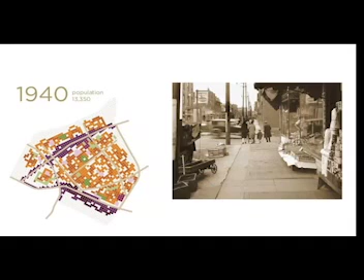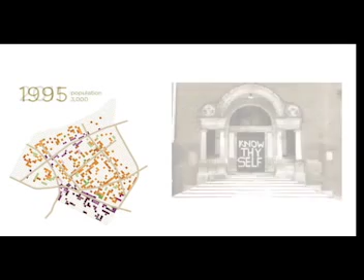In 1940, things were booming, but by 1975, the population had dwindled by half. By 1995, again the population was cut by half, down to 3,000. And in 2011, when we worked with them, the official number was 2,000, but there was probably about 1,100 or 1,200 people in the community.

This is pretty difficult for folks to go through, and there's a lot of social trauma that comes with this kind of devolution of city systems. I want to point out that this school you see in this image will play a part of the story later.

We worked with the community, the Larimer Consensus Group and the Kingsley Association, to think about what their future could be, and talked about things like stabilizing, consolidating resources—whether that be vacant lots or human resources—growing, and how one can create economic security, and diversifying to increase resiliency.

And then finally, when you get to a condition of stability, how do you sustain that stability? How do you maintain vibrancy in these communities? So if I put these two diagrams side by side,

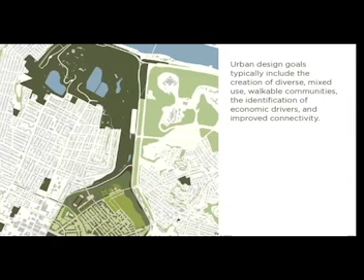We often talk about urban design or the creation in neighborhoods and cities with land use, and we might talk about open space or mixed use, and we'll talk about connectivity. Those are all really important things that will continue to play a role.

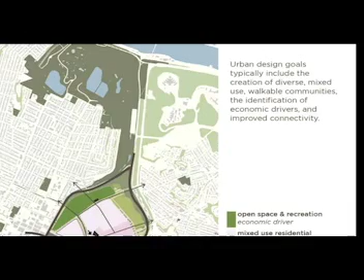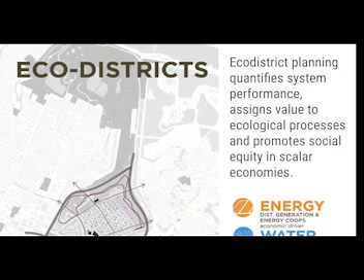But in order to transition to thinking about eco-districts, we need to talk about the resources and flows that move through a site. So what is the performance of that system? How do we assign value to ecological processes? And how do we take into account social equity at all these different scales that we might be discussing?

So environmental systems depend on physical infrastructure, but they also depend on social infrastructure. And eco-districts allow us to have that conversation. They're holistic models of sustainability planning. And really, it empowers people to take ownership over their individual and collective futures. So it's very concerned with how a community sees itself, how it functions together, and how it relates to its infrastructure. So we talk about eco-districts as focusing both on the hardware, or physical systems of a place, as well as the software, which sounds remarkably like how that report defined resiliency.

So we did a little thought experiment, looked at all the past plans that had been thought about for this community, and kind of put all the strategies out there and said, how do you begin to understand all these things that you do in a community? They're all great, all these kind of sustainability strategies. And we said that for each of these systems, though, there's a kind of optimal scale or scales for that system to function effectively.

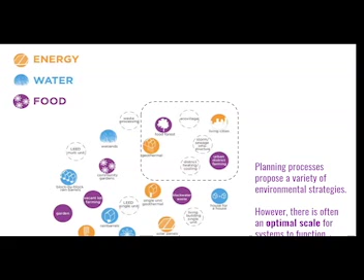For instance, anybody can change a light bulb or plant a garden, and they should. But in order to work as a city or a community, it needs to be aggregated to get to a larger scale, but perhaps not as large as the scale that it had been functioning before. Decentralization is now more possible, and in many cases more resilient than some of the larger systems.

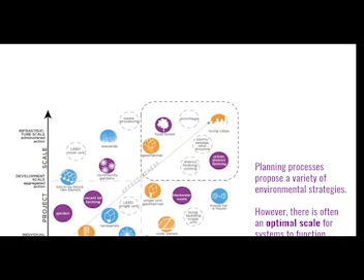So when you look at some of these things, they take more time and they are larger scale, they take more capacity. And so we look at what the community capacity is to relate to these systems. So how does a community make decisions? How do they transfer knowledge or learn together? Do they have legal structure to act, and do they get financial resources? Most communities start with financial resources. If we only had money, that'd be great. However, in order to get that, you have to have these other three things in place to function effectively.

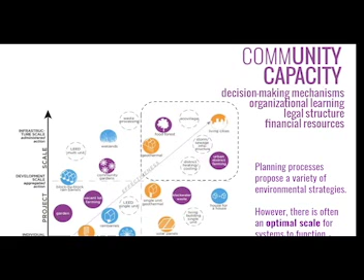So in thinking through how this works, we begin with questions, and they have to be big questions. How can energy independence make a community more resilient? Place is really important, and how we might design things to embrace these systems and to demonstrate these systems and to function in these systems.

But so is performance. In this community, we asked, what would it take to make a net zero community? It would take actually 40 acres of photovoltaics and 63 acres of commercial photovoltaics to deal with the residential and commercial loads. And when you look at the actual pattern of the community, those squares or those areas, there's actually not enough rooftops. You're really looking at a kind of utility scale to make that possible. So we're looking at interim opportunities for generation and interim technologies as we continue to look for opportunities to make net zero contributions.

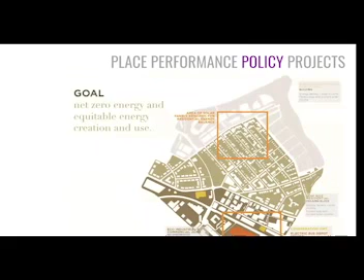You look at projects, and this is the part that people focus most often on, but it has to be paired with these other big picture ideas. You look for opportunities when a school comes up for renovation where you can do things like geothermal or solar, leveraging public infrastructure. Look for where new things are being built and amplify the standards, incentivizing above and beyond performance. And you have to look at the existing fabric to understand where certain technologies can benefit the systems and the people already in place, knitting it back into the community fabric.

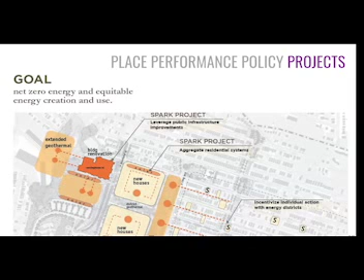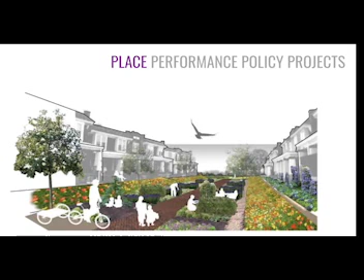Likewise, we looked at food systems. What is the character of place, and how does it not just represent a beautiful area or spatial typology, but how does it represent different ways of working together? What is the performance that should be targeted for this? In this case, taking the Living Building Challenge and looking at how we might meet some of those requirements for on-site food production at the scale of a neighborhood. And then really importantly, how does it play out with the patterns of the site, where do you have opportunities to connect the dots and make sure those resources and flows work together?

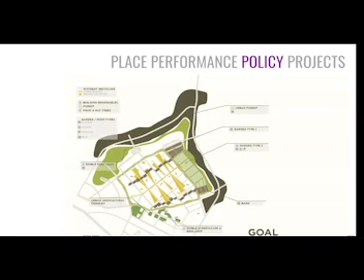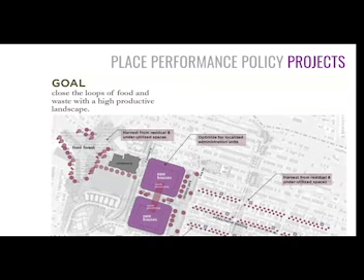And then taking it back down to the project. Things get done by project scale, so you have to bring it back down to a project scale setting. So the last one that I'll share with you is water, and how does water become an asset, not a liability, was an abstract but important question for this community when we started.

We looked at place and what the opportunities were to make interesting places relative to water, and what performance we needed to get to a net zero aspect for every community member there today and every community member in the future. We looked at what opportunities there were because we knew we had things like stormwater overflow problems to solve and upcoming infrastructure investments, something that most cities are dealing with.

We looked at policy scale of how different things get enacted in different places, how a residential area might benefit from certain policies and incentivize water streets or public realm improvement, while say the larger scale developments or even light industrial might be more site-based or development-based infrastructure.

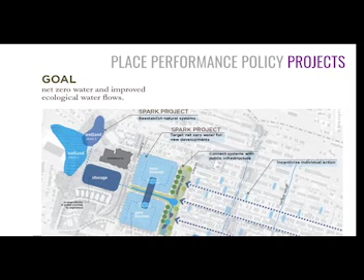And lastly, we looked at different projects, again looking at this area to say, where is there large-scale infrastructure improvements planned, or building projects planned, and how do we take a part of that performance and apply it to that site, and weave it back into the systems of the community.

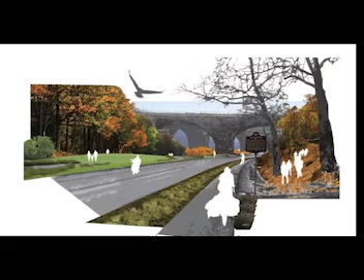While doing this, tragically, just downstream, we had a disaster that was very powerful to us and the team to understand the importance of our work. This site that we had kind of imagined as part of that process now has storage warehouses because it's not a great site, and it's less than perfect for occupancy. But really, when you look at the ecological pattern, it wants to be a water storage place. It wants to be a wetlands and had indeed been a wetlands before. So as we begin to integrate the right solutions in the right places, integrate ecological systems, we have the ability to make change if we can get there fast enough.

And that takes us to the point of, how do we get this to scale? Can design really change a system or systems? We have physical scales, time scales, scales of influence, as Marc said. Let's talk about these to say, how does a community leverage so much more?

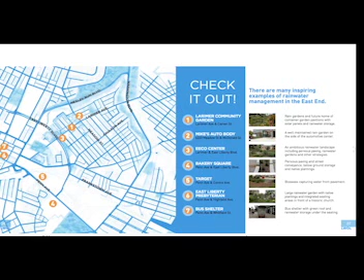Well, in Larimer, they were able to get a number of different infrastructure built, anything from top of the line green infrastructure at Google's headquarters to a water utility park for the community. They were able to leverage larger grants like the Army Corps of Engineers to look at centralized systems, still decentralized from the larger regional system, but how to keep that water and those resources closer to the places that they originate, and how to weave development into that.

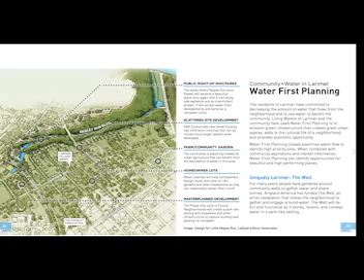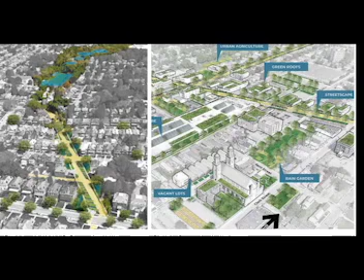This idea influenced things way beyond the community, including getting those principles included in Pittsburgh's Water and Sewer Authority's EPA-compliant Green First plan for green infrastructure, which then Buffalo Sewer Authority wanted to emulate in their Rain Check 2.0 plan. And it didn't just influence upstream, it influenced on the ground.

The Kingsley Association, a good community partner, is invaluable, and leveraged over $3 million in volunteer hours, trained energy auditors, helped people understand how to start micro businesses around this, and has been able to carry forth this into the lives and living of folks on the ground.

One of the most concrete ways that they leveraged this was to inform their Choice Neighborhoods Initiative development, and to get that $30 million that then leveraged $401 million with various infrastructure, public and private investments. And so affordable housing remains on the site, even maybe more than it had been prior.

Eco-districts influenced across the city all levels of neighborhood planning, from large scale, what we call tabula rasa, new developments on brownfield sites, to weaving it into existing neighborhoods, what we call quilted districts in the uptown neighborhood, influenced through city code, zoning code, and codes applying to master plans.

So the last one I'll just say is kind of how the ideas catch fire and how it creates influence and learning networks much broader.

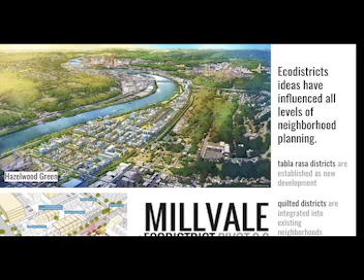A borough called Millvale was interested in this and took on, through two plans, a Pivot 1.0 plan and a Millvale Ecodistrict Pivot 2.0 plan, some great ideas appropriate to their community. That's a whole other presentation, but to say they caught on to things, started looking at air quality and food systems, and really began, through projects and these larger scales, to put these pieces of the system in place.

Their neighboring borough of Sharpsburg said, this is interesting, we have flooding problems, we have other issues, let's see how it applies to us. And lastly, their neighboring borough, Etna, said the same thing and took on a planning process that looked at how these things might apply to their municipality.

Together, these three municipalities formed the Tri-Borough Eco-District and influenced the formation of a citywide organization to help municipalities or neighborhoods talk about eco-districts, and that's called District PGH.

Working with the ecodistricts.org organization and the Ecodistricts protocol, they actually influenced what was included in the Ecodistricts protocol, and ultimately they became the first three certified ecodistricts in the world. That wasn't the point of what they were chasing, but the certification became a validation that what they were doing was recognized by others as being important and stringent, to be honest.

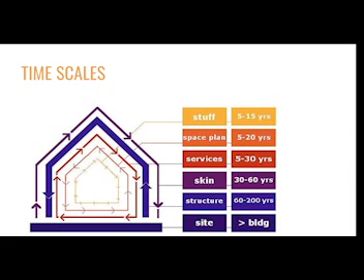There's a direct taxonomy of the things that are inside a building. If you look around yourselves right now, the furniture you're sitting around is going to ugly out way before it wears out. So a lot of things around you are going to change in 5-15 years, and that's expected. But if you look at the bigger things, working your way into the system, those are more durable. So we have to think in terms of that time scale when working with buildings.

The other aspect is the way buildings are delivered. You have the inception, then the design, then the construction, and there's many ways to deliver that. But once construction is done, there's this magical handoff to the owner, at which point the design and construction team is basically disincentivized from hanging around and learning more about the building. Meanwhile, the owner and the O&M team come in and start operating it.

So there are different frameworks we can apply to make better buildings. Living Building Challenge is an absolute type of system where we look at different imperatives. There's LEED, which is the gold standard as far as global green building rating systems go. I'm not saying it's the best, but it's the most prevalent across the world, used in 160 countries. Our firm has worked on hundreds of LEED certified projects, and it's a very good system because it allows you to plug in all the different strategies and goals you might want for a project, from design, construction, operations, and maintenance.

Passive House is emerging as a very key way to deliver buildings. Also simple goals, hard to achieve. But the idea is that if you make a very tight envelope, you can minimize your mechanical systems and make a better, more durable building.

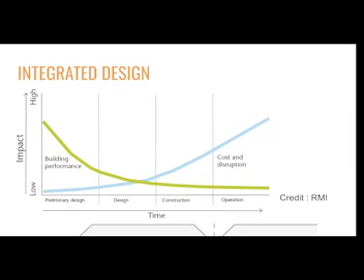The idea here is to make your meaningful decisions early, hence the goal-setting charrette and selecting a suitable framework. The way we approach that is by looking at the project goals, which we tie to the project or client vision and mission - whether it's a football team, a nonprofit, a healthcare system, a higher ed institution, or Mr. and Mrs. Jones wanting to do a renovation. You have these goals, and then you try to customize sustainability strategies to apply to that. So the idea is to start early.

Now we're here to talk about the Living Building Challenge, and we're up to LBC 4.0 now. I'm going to show you two projects - one was 1.0, the other was 2.0. But the beautiful thing about Living Building Challenge, without getting too much into the genesis of it, the idea was: okay, what's beyond LEED?

Back in 2006, a couple talented people, Bob Berkebile and Jason McLennan, took on the challenge to crystallize what makes a building achieve absolute sustainability goals with regards to water, energy, materials, beauty, and health and happiness.

The idea here is that you have these principles you work towards, and they're all prerequisites. Unlike LEED, which is a relative rating system where you get points if you do more, here there's really no room for error, which makes it more difficult to achieve.

The first project I want to talk about occurred in Pittsburgh. It's the Frick Environmental Center, part of the Pittsburgh Public Parks system, so it's free admittance if you ever get the chance to go. Here was the team, the architect Bohlin Cywinski Jackson, a notable national firm, as well as other talented folks.

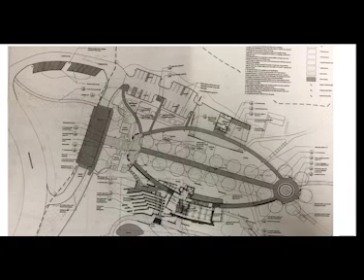There was an environmental center there back in the 1980s which unfortunately caught fire and burned down around the year 2000. So this building sat empty for about 10 years until the genesis to redo this came about 8 years ago. The idea is that it goes down that hillside across 3 levels with office space. Water, energy, and materials are going to be the 3 key aspects of a living building.

For water, you can see the rainwater catchment off to the upper left. Those photovoltaic panels actually double as water catchment panels, and you have site water as well with a cistern down below. Unlike other parts of the country, stormwater is a big issue in the Northeast. We love water and need it, but when we have too much of it too fast, it becomes a liability. The idea is we're able to store that water and use it.

It's not potable though. LBC allows you to draw that line where the law stands, and that's the case for us, so there's no question of drinking stormwater. Your results may vary, other places may be able to do that, but that's not the case for us.

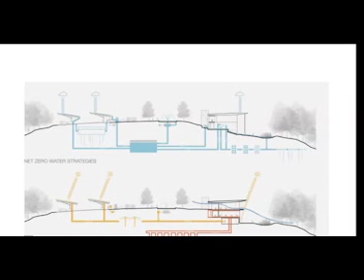Down below is the net energy zero diagram, and you can see a big photovoltaic array, I think it's 125 kW, and then geothermal heat wells down below. When you put all these things on the site, you've got the building on the bottom and the PV panels up on top, and they're there for a reason.

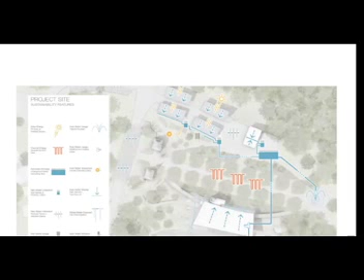That's a carport. So rather than typical terrible asphalt parking for your car, here you've got a very nice, comfortable place that's shaded by these photovoltaic panels.

The idea is that it's beautiful when it's not being used, or beautiful when there's a big storm and it becomes a rainwater garden that celebrates that. Since this is the Frick Environmental Center, it's meant as an education center too, so there are kids who come in and out all day getting classes and lessons on how natural cycles work.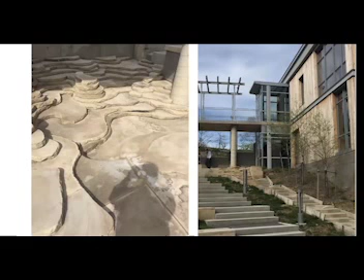Here's the rain garden to the left, shown in a dry condition, and you can see it in action on the right. And then tours, of course.

This is something we put together with the AIA 2030 series, so we had a number of people come through. I've taught classes at Chatham University, and this is one of our key places where we take people through.

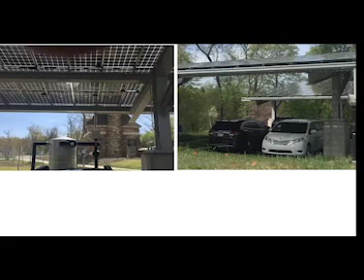There are the PV panels on the left and the cistern, and on the right you see cars parked under the PV panels. It's actually a very elegant way to do it.

The second case study we want to give you is the Phipps Conservatory Center for Sustainable Landscapes. This one was earlier, and it has had much more impact for a number of reasons. The Living Building Challenge came out in late 2006, announced at Greenbuild in November in Denver. In January 2007, Phipps's visionary leader, Richard Piacentini, decided he wanted to do a living building and approached us to help make this happen.

You can see the Design Alliance emerged as the architect, with CJL Engineering and Turner Construction. This was a process that ended up being successful, but for a time it was difficult to figure out, because we didn't know what a living building really was. It took a lot of meetings and thinking.

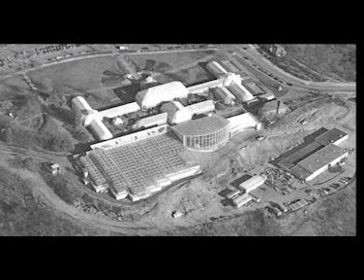The one with the black roof actually ended up being renovated subsequently as another living building. Stay tuned for that, because it's still in the performance period. We just helped it get a LEED Platinum certification, but the LBC is still in the performance period, because you have to show 12 months of actual net zero performance.

But it's the white buildings just to the left of that which ended up being demolished and created the site. This site was actually the spoils for city dumping—oil cans and things like that—so it wasn't a very clean site anyway, in spite of this beautiful southern exposure to one of the city's big parks. The first project I showed you was Frick Park.

This one is called Schenley Park. They're related topographically, but they're different areas of the city. Oops, sorry, I forgot about these things here—that's what have helped. Okay, project site. There you see where we are.

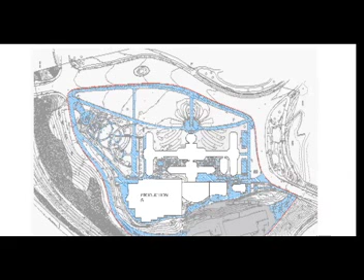Looking at it now from a straight north-south perspective, the area in gray at the bottom is the project site. The idea was to make a 24,000 square foot office building. Frick, by the way, was 17,000 square feet—I forgot to mention that. Both on 3 levels though, and similar programming.

The idea of classrooms, offices, kitchenette, restrooms and things—a standalone building, but the idea is that it's more office space than anything. Frick has classrooms; this one has a conference room. That's probably the only way they would differ.

So we started having charrettes early on in the process, and 7 Group was also brought in—they were very key to having these charrettes. I think Bill Reed is part of 7 Group at this point.

The idea was we had to discuss all of these things: how do you take these goals, prioritize them, make them real, make everybody agree on them, and then inculcate them into the design, and then the construction, and then the operations and maintenance. So it took a lot of thinking about how do we kind of reinvent the wheel here.

With the integrative approach that we used, we really had a 'come one, come all' approach. So we had a lot of charrettes with a lot of people, and some of these would last all afternoon or maybe even longer. You have to really be conscious of your efforts when you realize you have $2,000 an hour sitting around a conference table.

When you add up everybody's rates, you have to make sure that it's worthwhile. And so that's where the goal setting becomes very important, because you have to be able to track all of these ideas and bring them on to the next if they make sense, or dispatch or eliminate them if they don't.

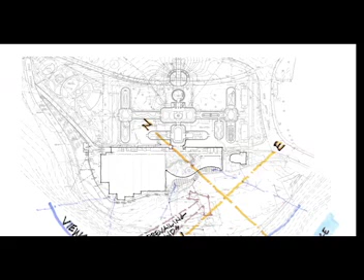So try to minimize your loads and work to that. Our early evaluations showed where the wind came from, where the sun was. And then the idea was to back this up against the building. Like I said, this is a hillside, so the idea early on was to berm this project against the building.

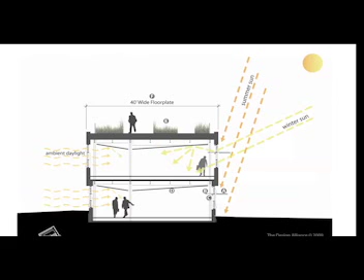But then better minds prevailed and thought, we can't berm it up against the building because then you can't get the ventilation and daylighting on both sides. So the building emerged as a sort of bar. Here are the 3 levels, including the rooftop. The idea is that you have cross ventilation and breezes, but also light coming in on both sides. So here's a diagram of the ventilation.

The idea is very passive. The cool air that you want comes in at the low, and then the warm air you want exhausts at the high.

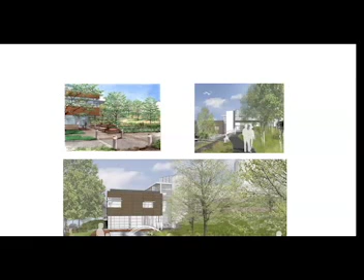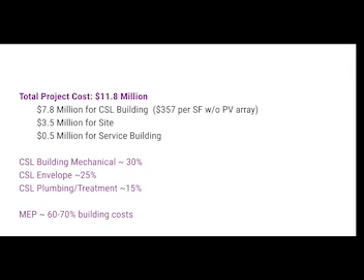Setting-wise, there's a lagoon, a constructed wetland. The project itself was about $12 million, about 8 million for the building, about 3 million for the site. And what we thought was interesting to share is that mechanical, about 60 to 70% of this ended up being MEP costs.

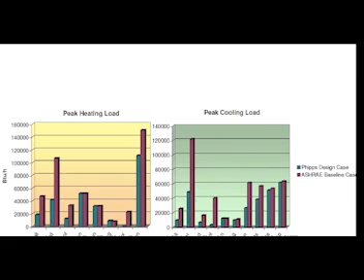The energy modeling, if you take a look at the blue, that's the project. If you take a look at the red, that's the ASHRAE baseline case. So the blue really performs better than the red in most every instance, whether peak heating or peak cooling. The idea is because you sited it properly and created a tight envelope, letting the outside in when you want it. And that really has paid off, so the envelope's very important.

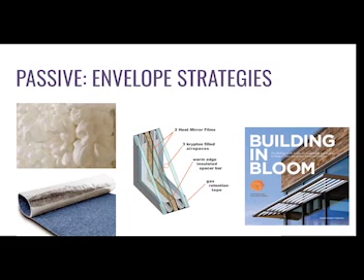We looked at double, triple glazed, foam insulation, even phase change materials, which I think are more exploratory than effective, but they do have some impact. We've had a number of different strategies employed in this building, outlined in the book I mentioned earlier. Our values are R31 for the walls, R43 for the roof, and the glass properties are much better than conventional, with different types of glazing on the north and south compared to typical.

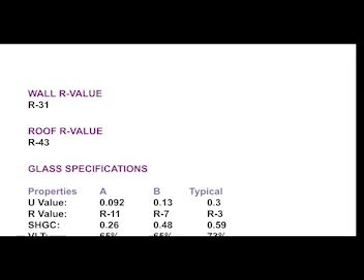So the energy targets, the energy model had an EUI of about 19. Now a lot of talk is about getting to net zero, and even if you're following 2030, right now you need to be 85% or so below the 2005 targets to get to 2030. So a lot of your goals would be around 15 or 20 EUI.

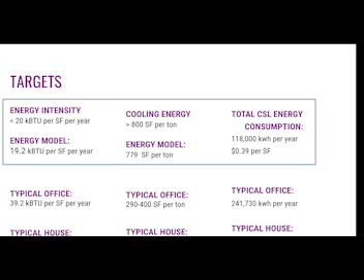Be careful of that, because that doesn't just happen. It's very easy for an owner to say, yeah, I want an EUI of 20. It takes a lot of effort to get an EUI that low. So make sure that your energy modeling follows along. Here, the project itself was compared with what an office would have and what a house would have. So it performs really well - it's essentially the equivalent of about 4 suburban houses.

So here's the way the building lays out. This is the roof, green roof looking down. The long left or right bar is the actual offices, so they get cross ventilation on the left-hand side. On the right-hand side, they're bumped up against the vertical circulation. So here you have the offices on the left, conference rooms on the right, and you can see the sort of circulation at the top - it's a sculptural staircase going up.

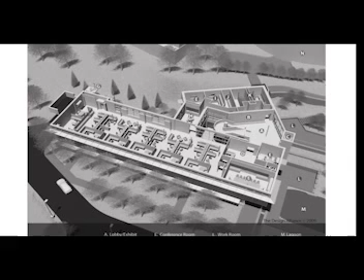You've got your restrooms against the hillside, which is appropriate, and then a kitchenette to the left of that. And on the first floor, more of the same, but there's a conference room down below. These diagrams are courtesy of the architect, the Design Alliance.

Here's a cutaway section through the atrium to the right and through the classroom building to the left. You can see the underfloor distribution of air, so air is coming up from underneath - you have displacement ventilation. On the right-hand side, it's a 3-story space, and heat is going to rise. Concrete framing is what was decided for this particular project in order to retain the heat.

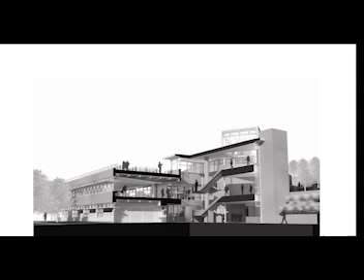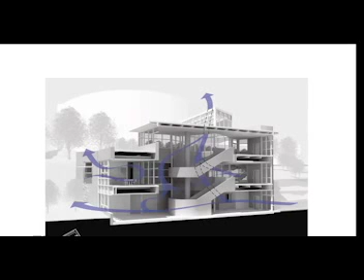And so there was modeling performed for that. Here you have that condition where the office backs up against the atrium. On the left, you see the air comes in and out, or goes in and escapes out the very top of the atrium. So right now in the summertime, that vent is open and it's sucking air out, getting rid of the hot air. In the wintertime, it closes up and there's an insulating blanket, so it actually conserves the heat.

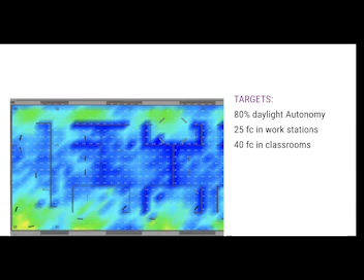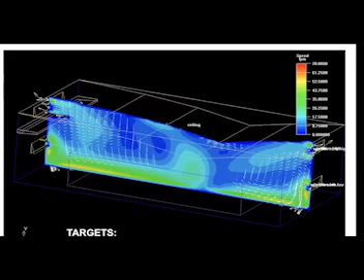Here you have the laminar flow of air in the transverse section. The vents are operable, but they're automated, so there's no question of accidentally leaving a window open all night or when it's hot. They're on actuators that open and close the windows. If it's okay to open a window, they'll open. It's really a computerized system that says, okay, temperature is good, humidity is low, it's okay to open the windows, and it will.

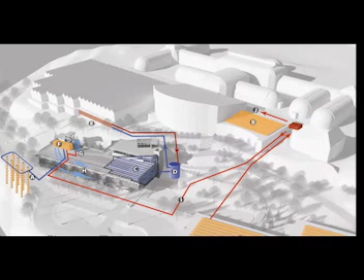A on the very left-hand side is the geothermal heat well. And C is the radiant floor heating, done for additional comfort for building users.

Water is also very important, so here you have a lot of rainwater catchment. Mr. Piacentini had the foresight in previous renovations to say, let's capture this rainwater, even if we don't know what to do with it yet—it'll go to stormwater. But when we build this building that I'd like to build, we'll have a place for this stormwater. Sure enough, the hillside here provided a place for the stormwater to go.

So E is a lagoon—I showed that in the perspective just now—and the water goes into the lagoon. Then K and I are the constructed wetland that takes the black water, because you have to deal with that now, from the toilets and kitchen sinks, treating it with an anaerobic digestion process.

You have the green roof there, A and B, that also serve to hold water. Green roofs are very effective because they'll hold up to three-quarters of the first inch of a storm and delay it so you don't overwhelm the stormwater system, while also creating a habitat.

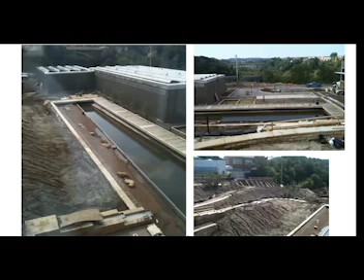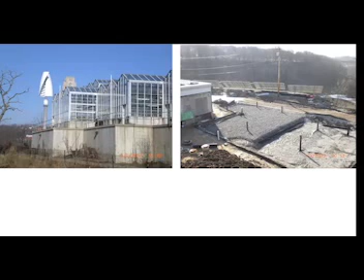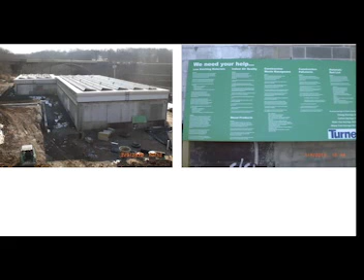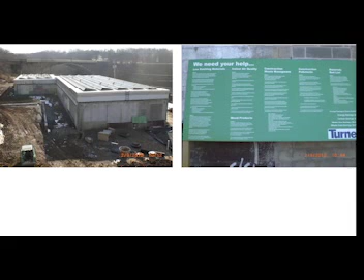A lot of education for your contractors. In our case, we weren't so concerned about the big contractor—in this case, Turner—we were more concerned about the subcontractors and vendors. So we had a pretty elaborate education process in place. Anyone who stepped foot on site was made to understand what it takes to have a living building. That way you don't have that 'oh my God, I got to go to Home Depot and get some liquid nails' moment—you eradicate that possibility because everyone understands what it takes.

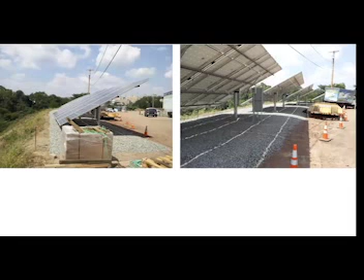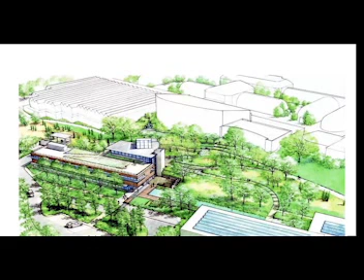This is a rendering from Andropogon, the landscape architect, showing the project in its final form. And this is what it looks like now.

So this project achieved, other than Living Building—it first achieved the Energy Petal, then it achieved Living Building Challenge. Prior to that, it achieved LEED Platinum; in fact, it was the second highest score ever given. It also achieved SITES certification and WELL certification. So this is a project that really, really walks the walk.

So now, when we talk about at what scale do we act, we have an opportunity to create a highly visible project that can serve to catalyze other training, other models. Part of it is showing what can be done. Sometimes you're on the bleeding edge a little bit.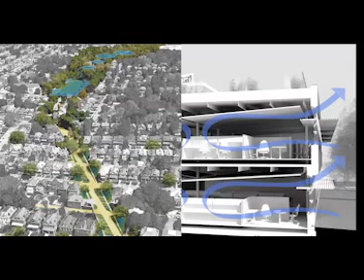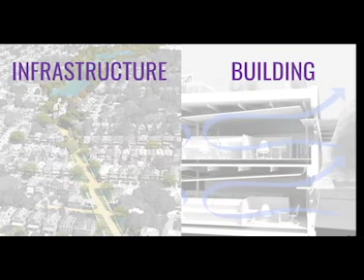Yeah, so thanks everybody for sticking with us at these two different scales. I think it's really important to think about infrastructure and building, and hopefully as you're thinking about a building, you're also thinking about neighborhoods and infrastructure. I know we saw some pretty fantastic projects in the design awards, and I'm sure those architecture projects could affect more than just what's on their site.

So again, remember, it's all a learning process. We need to figure out how we look at different physical scales, how we think beyond today, and how we think about making an impact larger than just our project in order to shift the systems.

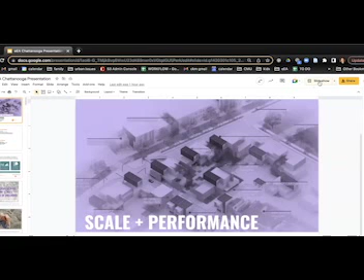Okay, all right, welcome everybody. This presentation is called Scale and Performance, and we're going to be talking to you about progressive projects at the building scale and also at the district scale. These have been pioneering, but the main idea is that they've also had a lot of impact, and so we've been able to leverage that. This is something you're going to be looking to do in your own project. It's well enough to have proof of concept and do something meaningful, but it's better when you can actually have a ripple effect.

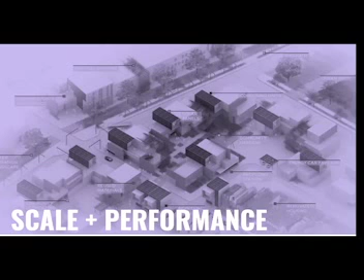Michael gave a nice bio description of us, but Christine and I have been partners for 20 years with our own firm, both embedded in not just our work, but in teaching and also on advisory boards as well. Our firm is called Evolve Environment Architecture.

We're a triple bottom line based firm looking at green building and consulting systems and design. We're B Corp certified, we're just certified, we're carbon neutral. We're headquartered in Pennsylvania, but we have a presence in 5 different states. And we look at sustainability from the perspective of what it means to people, the processes that are employed, and place-based sustainability. A lot of that has to do with sustainability frameworks that we will talk about in this presentation.

So in talking about scale and performance, there are different aspects to this, whether it's a physical scale - a space, a building, a campus, a district, a city or a region. We also have time scales where we're looking at the design and construction of a project, but we could be looking at the ripple effects for centuries, not to mention the impact of millennia ahead of us. As well as scales of influence, where you can do a successful project and leverage that for more benefit, whether it's as a tourist destination or a change in law or regulations. As a result of your project, there can be a lot of scaffolding and leveraging that occurs with regards to your particular project.

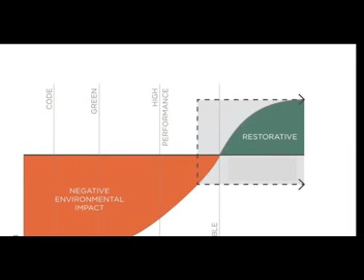The paradigm here that we want to try to explore with this presentation is how do you actually do positive restorative construction? So it's not just an idea of doing less bad, but doing good with absolute impacts, not just relative ones. So at what scale do we act? Let me turn it over to Christine.

All right, so this is where we already can cut here because I had already done the previous slide. So, as you wish. Hopefully you got all that, Michael.

Uh-oh, did we lose him? It is still recording now. Good, oh there you are. All right guys, yes that's perfect. Thank you, okay great, looking good there Michael.